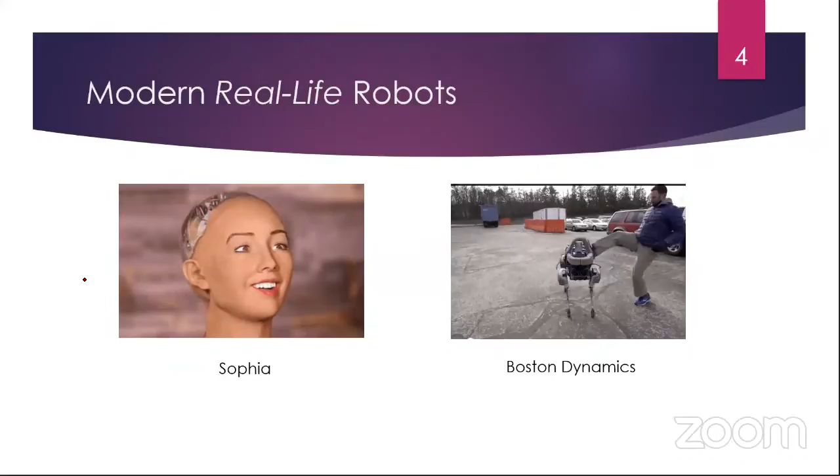Same goes in offices. These robots will not carry papers from one place to the other, bring out papers from one shelf, put them into another. So those kind of jobs, although they look boring, maybe we are not fascinated by that, but we are still very far off from those kind of operations. So although these robots are impressive, they are very far off from what a human is capable of doing.

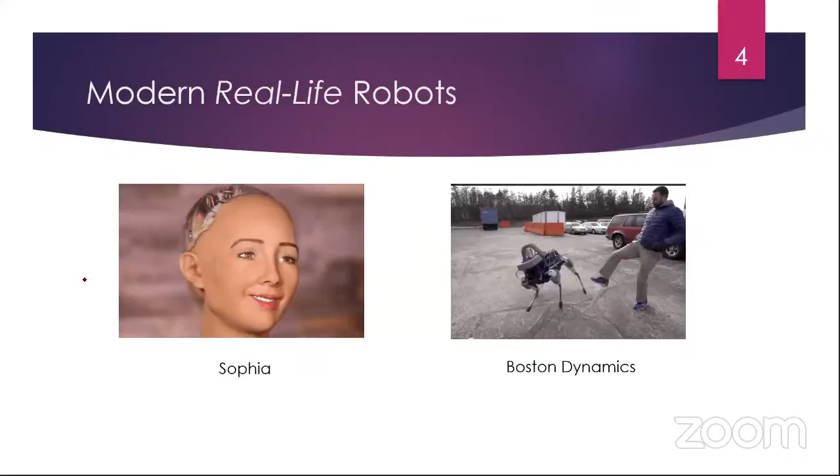So this talk is mostly about the fact that we have now set the standard too high. Sophia robot, extremely capable. Boston Dynamics robot, again extremely capable. These are made in very sophisticated labs, lots of resources, teams of hundreds of people. So the thing is, as engineers working independently or in smaller teams, or in areas where robotics is not the main specialty, what could we do about it?

So in this talk, we will, inshallah, discuss the key ideas, the key skills that we need to acquire before we can make some meaningful robots. And as I mentioned earlier, even though these robots are very specialized, they are still not up to the mark.

And probably some very dull robots, very simple robots, we could make those and they could help us a lot in our homes and offices. So they will not be exactly human-like maybe, but they could help us a lot in our daily life. So that's the goal here. We are not looking forward to making some very fancy looking robots, but looking forward to making robots that help us in our daily lives.

So the first thing, as I mentioned in the very first slide, there are three things that you have to know about. First is, of course, the motion. A robot will be called a robot only if it moves. So the first thing among the basics is actuation, that's the movement. Actuation is when the movement is done through a motor or a mechanical part or anything like that. So that is what we call, in the jargon, the actuation.

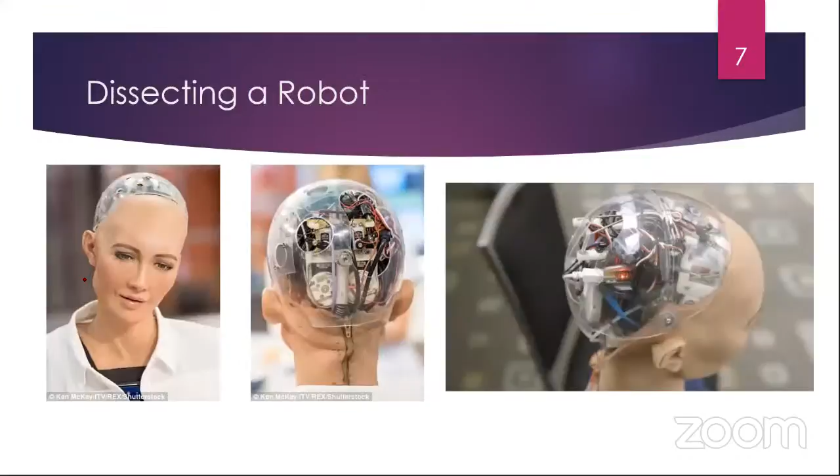So we will see what we could do, as smaller teams in universities and as engineers. Let's start dissecting a robot. Let's go inside and see what makes a robot a robot.

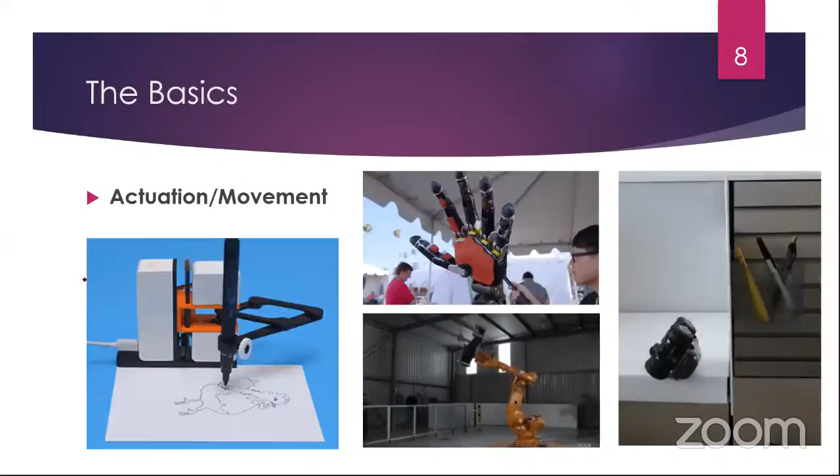The first thing is actuation, the basics. You can appreciate that there are different types of motion. Simple circular motion takes a car from place A to place B. Then we have linear motion, which helps you move things from one place to the other in a linear fashion.

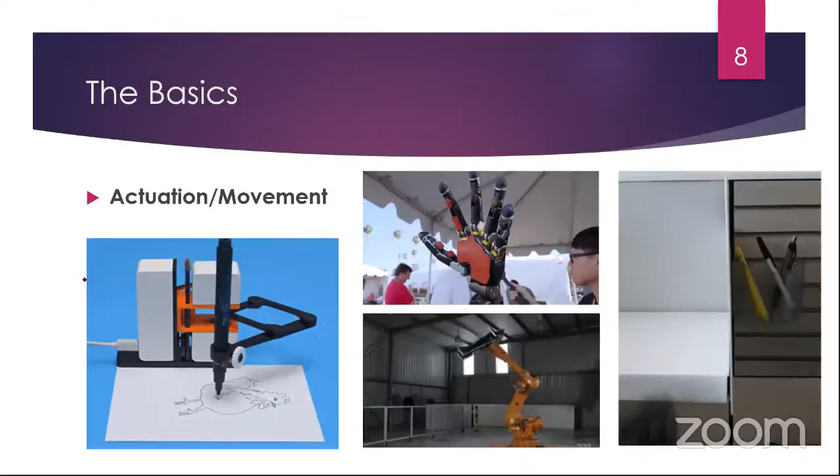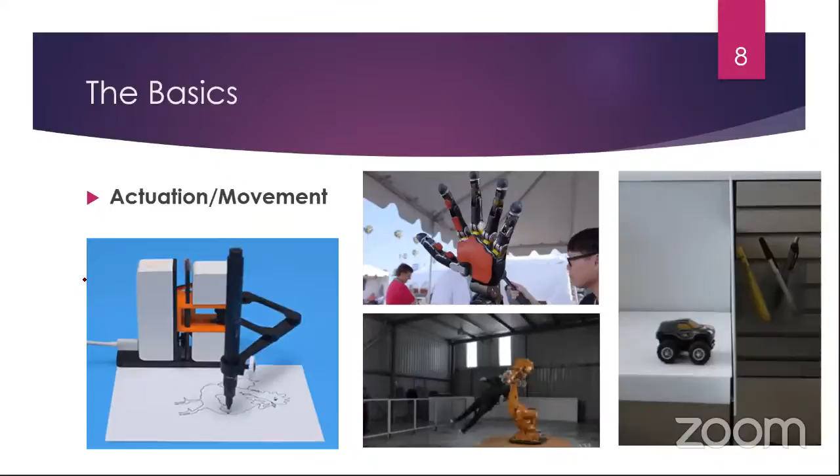And then you could have some very sophisticated motion. For example, in a printer, you need to put ink at a special place exactly where you want it, so very sophisticated motion there. And then grabbing, like a human-like hand for grabbing things, or an industrial grabber for moving heavy objects. All of these require different kinds of motion.

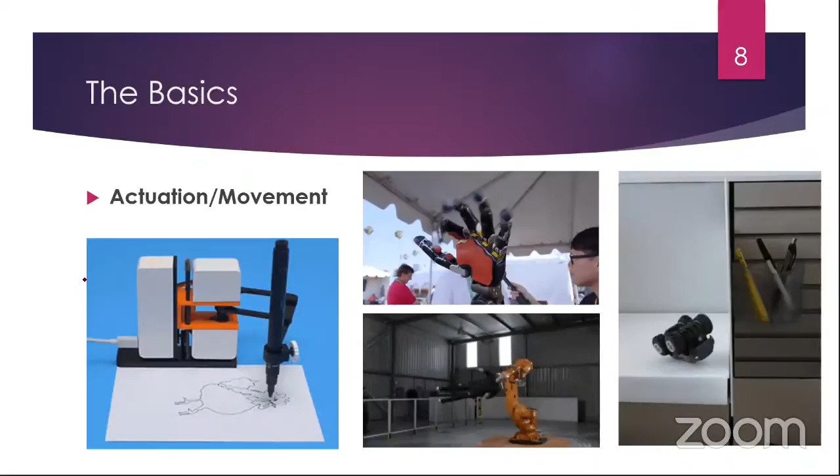So each type of motion requires a different type of motor. I will briefly go over a few types of motors you have to use to achieve those goals. For example, the continuous rotary motion everybody is familiar with, DC motors. Although I've lumped everything up under this small topic of DC motors, there are just too many varieties. DC motors have multiple types.

Some of them are geared to give you extra torque. Some of them don't have gears, to give you a lot of speed. So there are just too many options out there. Once you go deeper into that, you will come to know.

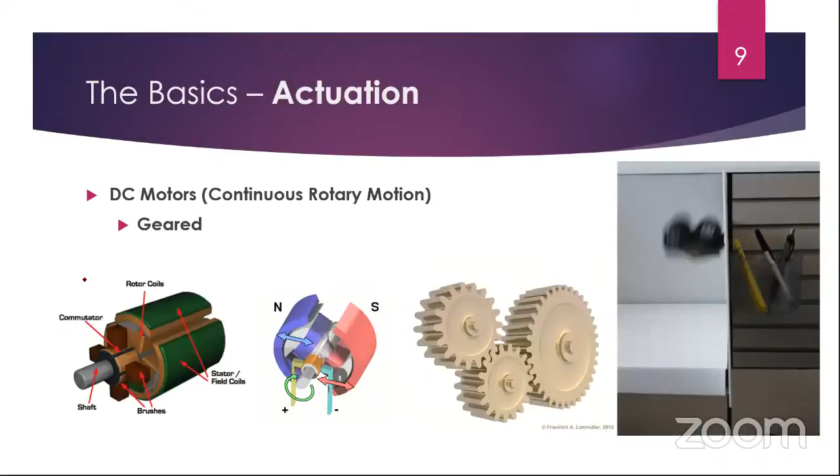Another purpose of the motors, as we saw, was precise motion. You would want the motor to go from one place to the other, or you would want your hand to move from one place to the other, maybe by a millimeter precision, for instance. That would mean you need to measure the amount of displacement that a motor has made, so for that we need these position encoders.

So in the previous slide, we saw that we add gears to the motors to add torque. And then we add position encoders into the motors so that we would also know how much the motor has moved, so that we could make the motion precise as well. Precision and torque - these are the two things we want our motors to have.

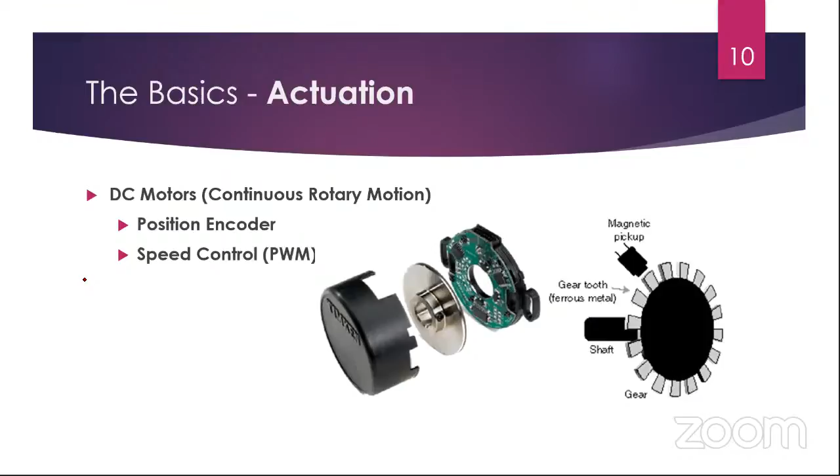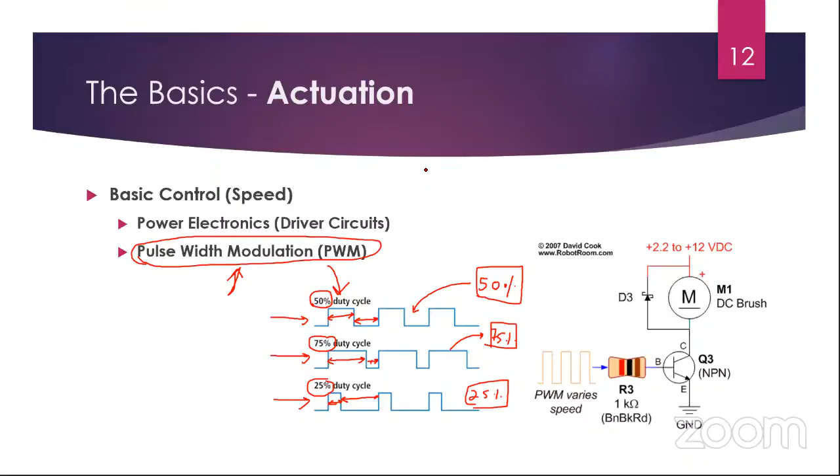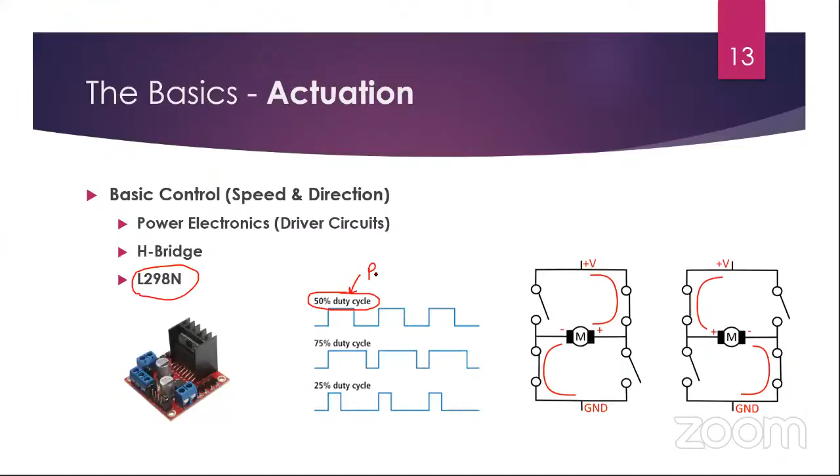Let's quickly move on to the topics where we impart intelligence to robots. Using the same circuit shown earlier, you could not only change the direction of the motors but also control their speed. Using the same type of pulse shape I was showing, there is a name for that: pulse width modulation. Actually, I think this was written here - yes, PWM is pulse width modulation.

So what does that mean? Pulse - we are changing the pulse of the signal, hence the name pulse. And since we are changing the width of that, hence the W. And modulation means changing, so we are changing the pulse width. This is how the motor is being controlled.

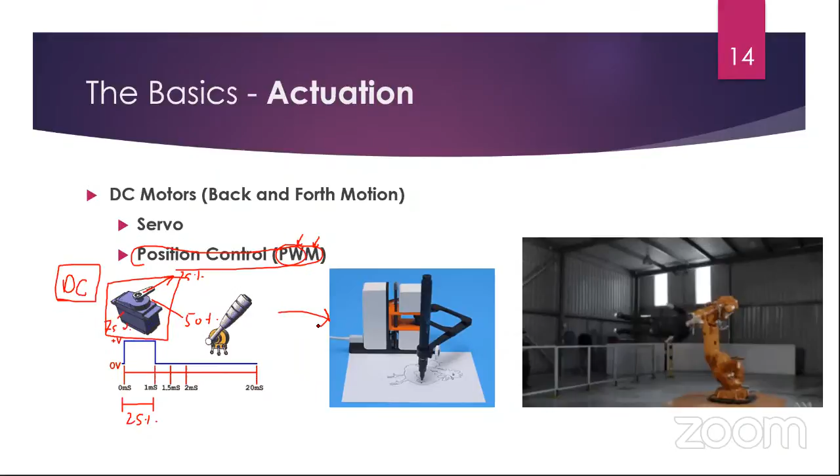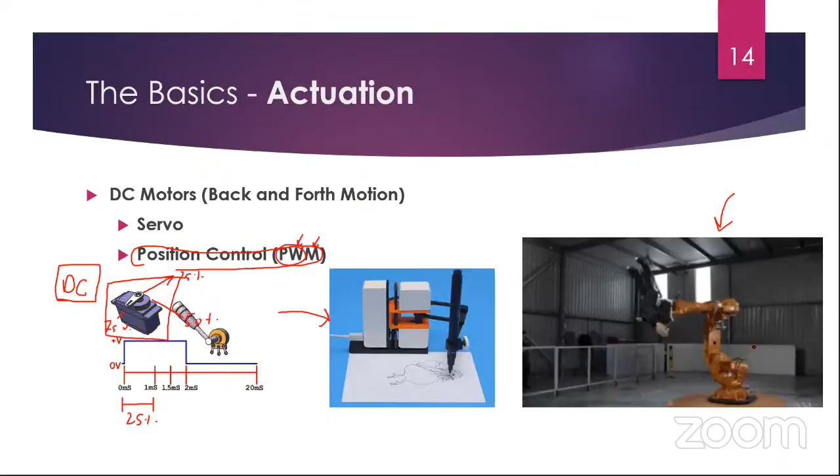This type of motor you could use if you want to build a robotic hand that can move by very precise movement. You hook up multiple of these and you can have a sophisticated design like this one - an industrial robot using 3 or 4 such motors, much larger in size, bigger motors with more torque, but the control is precise, similar to this pulse width modulation. You hook up multiple of these and can make a very sophisticated robotic hand as well.

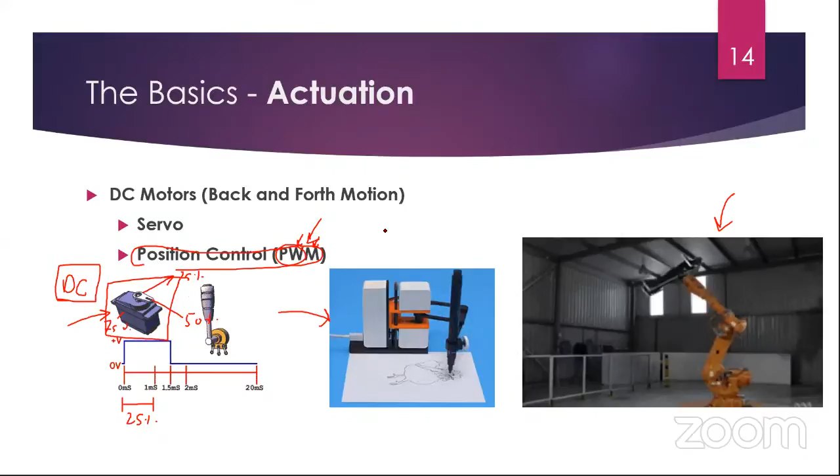So we have seen that motors can give us some torque. We can move them precisely. We can move them in either direction. And these gears help us carry a lot of weight as well. So these are the motors that are already available.

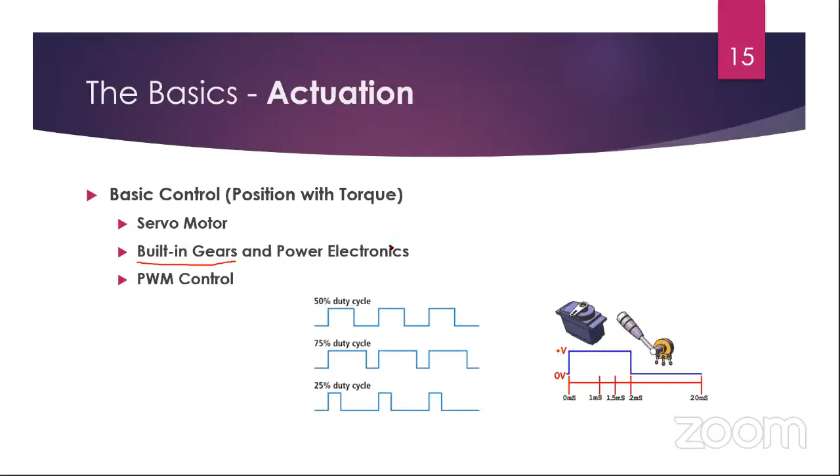And in 2021, we have a lot of very good options available in the market as well. You could very cheaply buy some very capable motors, capable in terms of carrying torque, speed, agility, and ease of control. All of these are pretty cheaply available in the market. To be frank, this is a very exciting time to be in robotics, because even if you are an engineer with low resources, you could build very interesting robots using this.

Another thing we could do with motors: although we saw that the previous motor, the servo motor, could do precise motion, sometimes we want even more precise motion, maybe in the order of millimeters. So that is what we have. For this, we have motors called stepper motors. Stepper motor control is a bit more precise.

It requires multiple pulses. If you are familiar with 3D printers or even normal printers, they make use of such motors, because 3D printers and your normal paper printers require very sophisticated control, since they print using either plastic or actual ink. So you would want them to make very precise movements there. This is where stepper motors come into play.

Generally, stepper motors, although very precise, cannot carry a lot of torque. So if you are looking for an application requiring high torque, you should use a geared motor, a servo motor, or a normal DC geared motor. But if you're looking for very precise motion, this is the motor you should be looking at. The position control requires multiple pulses, and they can be a bit harder to control. But there are multiple hardware drivers available very cheaply in the market that take care of most of these intermediate steps for you.

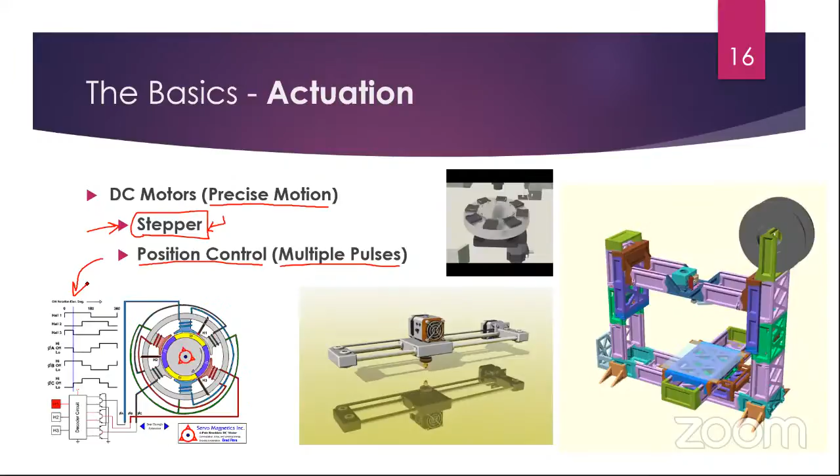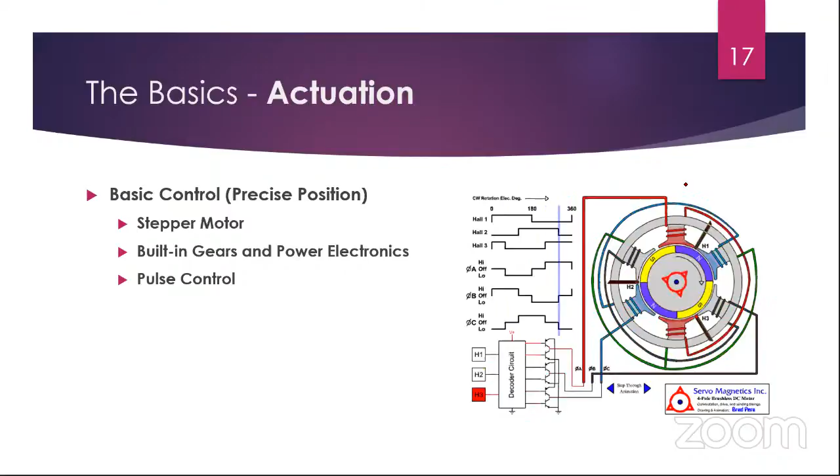So this is some further detail of the same thing. You can see that in order to move it very precisely, in the order of millimeters, you require a very sophisticated set of pulses as input.

So we have seen the basics of the motors: three types of motors to impart speed, torque, or precision. This is the summary of these three.

Then we would, of course, want our robots to feel the environment. In order to feel the environment and make some basic decisions, they would want to make use of some sensors. The sensors can be some very simple ones; for example, some sensors can sense the distance using an ultrasonic sensor.

Maybe some of you are already familiar with this. This ultrasonic sensor, using the echolocation principle, can sense the distance between the sensor and the nearest obstacle. This is a very simple sensor, very easy to use, very commonly available, but of course it has some limitations. For example, if the object is at an angle, sometimes if the angle is too sharp, it may not be able to detect that.

Secondly, it does not work on all kinds of materials. For example, on harder surfaces it will work really well, but on softer surfaces like clothes or foam, it may give you either no reading at all or some very noisy data.

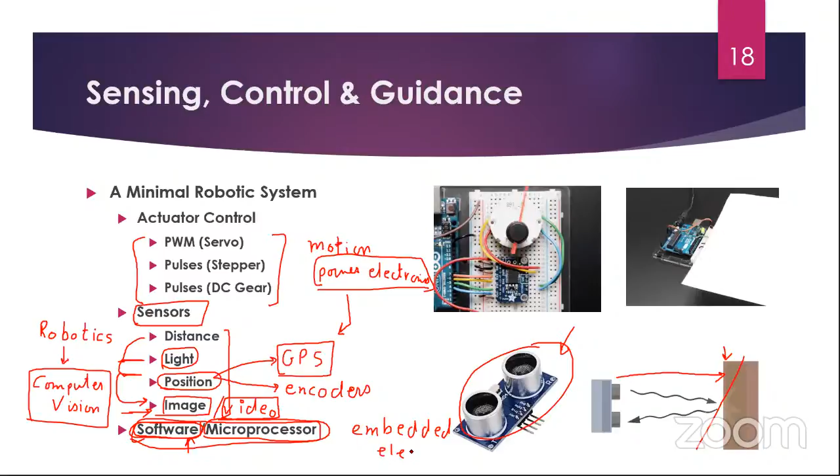So 3 skills, if you want to at least make a robot that is intelligent enough. Not too intelligent still, but if you want some meaningful intelligence, at least 3 skills are required until this stage.

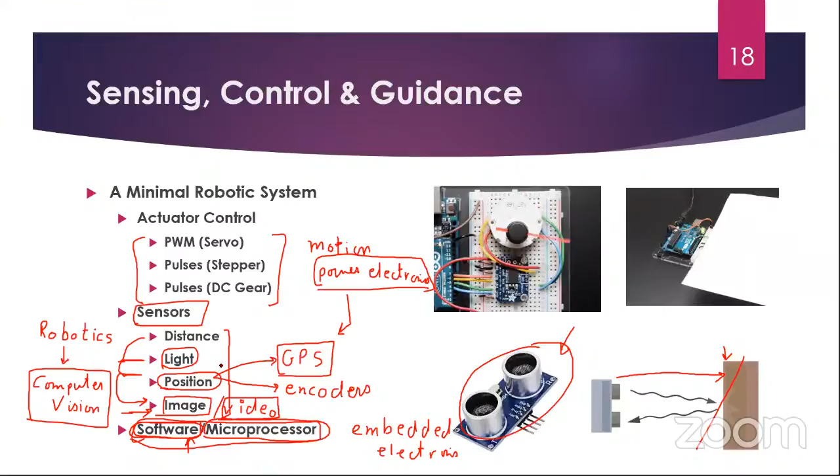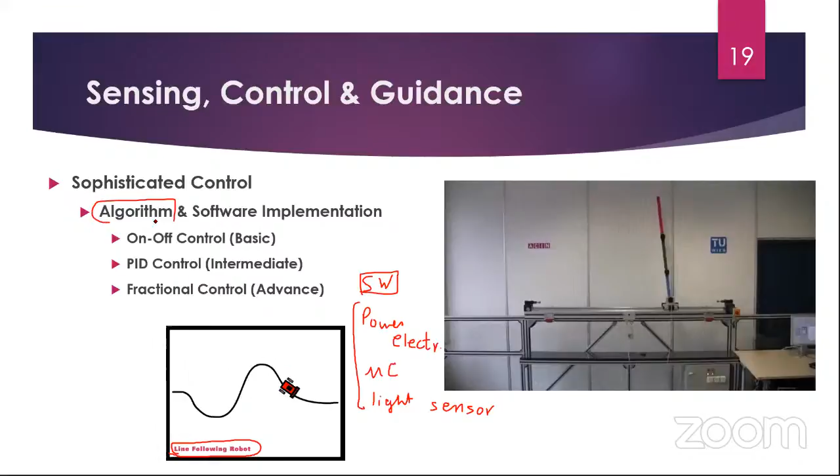The algorithm - even this simple line following application has a variety of choices for the algorithms. You could do a simple on-off control. How would that work? On-off means that your robot turns left, and if it tries to go off the line, then you start turning right. And then again, if it starts going off the line, you turn left. So you just keep on turning left, right, and that would be a simple on-off control.

But you know that control is horrible. This will work only for very small robots, and if you try to make a slightly bigger robot, or you would want a smoother motion path, then this is not going to work.

So in that case, we would want at least a PID controller. So going from basic to intermediate, this PID controller - those of you who have taken control system courses may already be familiar with that. So this is a much better controller than the on-off one. But quickly we have added another skill to our required number of skills.

So that is the basic control. So you would know what is actually PID and how that would come into play when you have the sensory data coming from this light sensor.

So this sensor is telling you a rough position of the robot, and how you use that inside a PID controller to make this motion smoother. This is still an intermediate level algorithm.

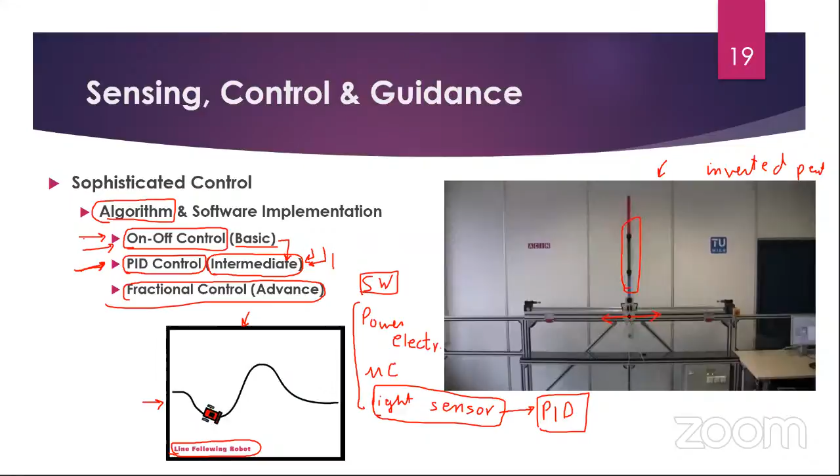And you see, the only motion that it can do is this translation motion. Using that and some sensors that it has, all these 3 links would have sensors, and those sensors tell the controller what is the position of each one of these links. Based on that position, it is trying to balance it. But the remarkable thing here is that it has only one available motion, and that is just translation.

So this problem could, strictly speaking, be also solved through PID. PID is actually a very universal algorithm that is widely used in robotics applications.

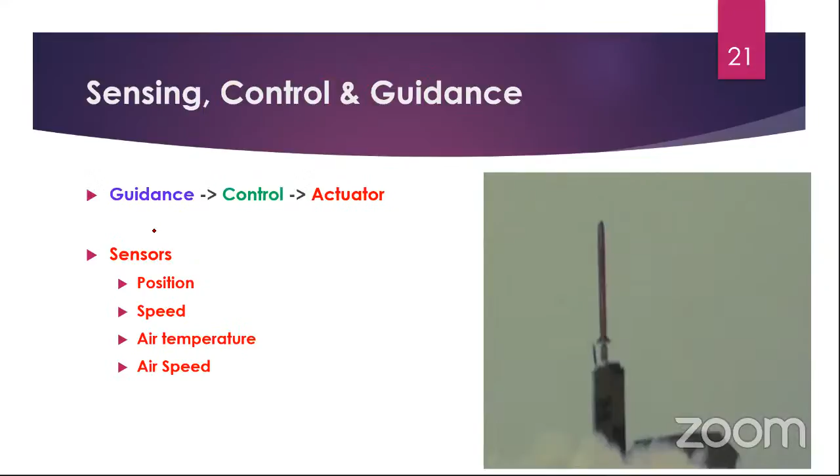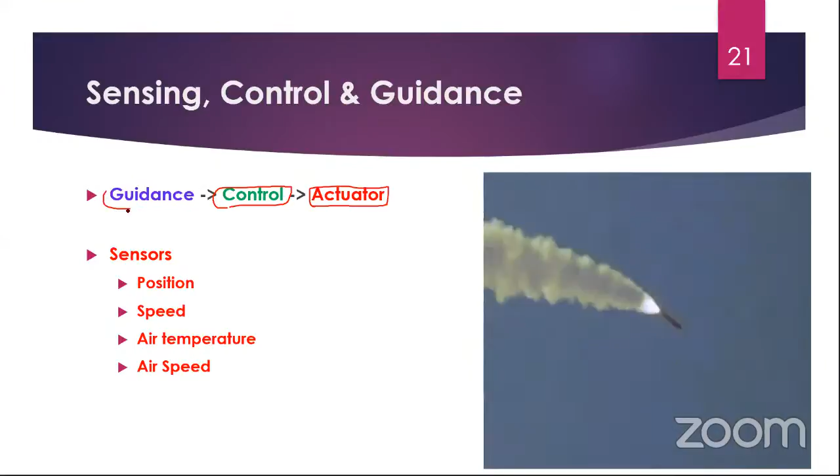That guidance could involve some more sensors. For example, in an actual missile, the actuator is a simple motor, sometimes a rocket or something, and you control the actuator through sensing - maintaining the position, attitude, speed, and height from the ground. But then you have to guide the missile, or the rocket, or airplane, whatever it is. Guidance is on top of these basic level controls, and might require more sophisticated sensors.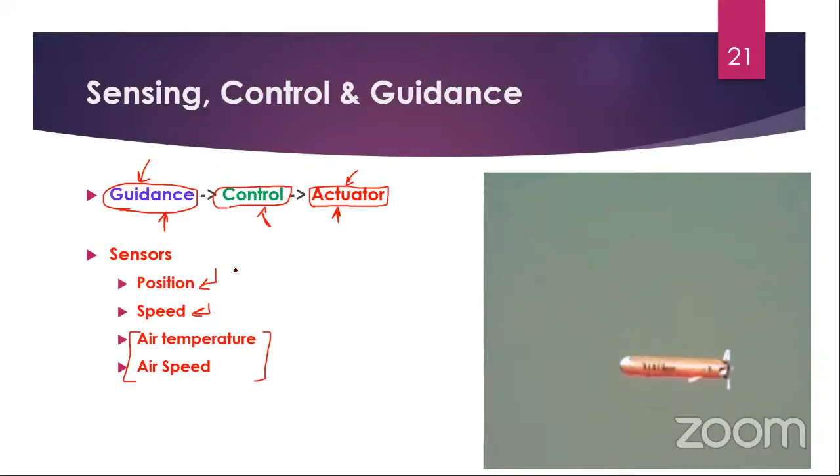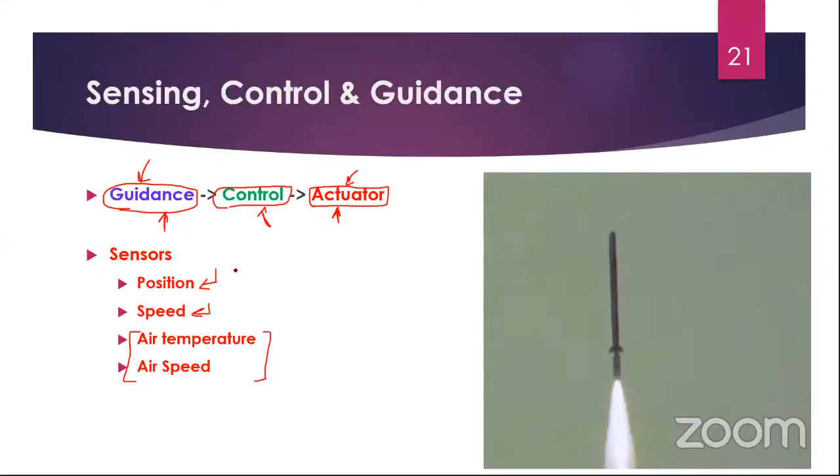Position is important - it was important for simple actuator control as well, but in guidance this is also important. Speed too - actuator control requires speed, and guidance also makes use of that sensor. Air temperature and air speed may not be very meaningful for the actuator control part, but guidance will use these sensors to make certain decisions. For example, if the air temperature is too high, you might want your rocket or airplane to climb higher or climb down, because the electronics cannot work at that temperature. Or if the speed is too high at lower altitude, you might want to go higher up so the airspeed is lower and there's less resistance. So guidance has its own set of algorithms and sensors.

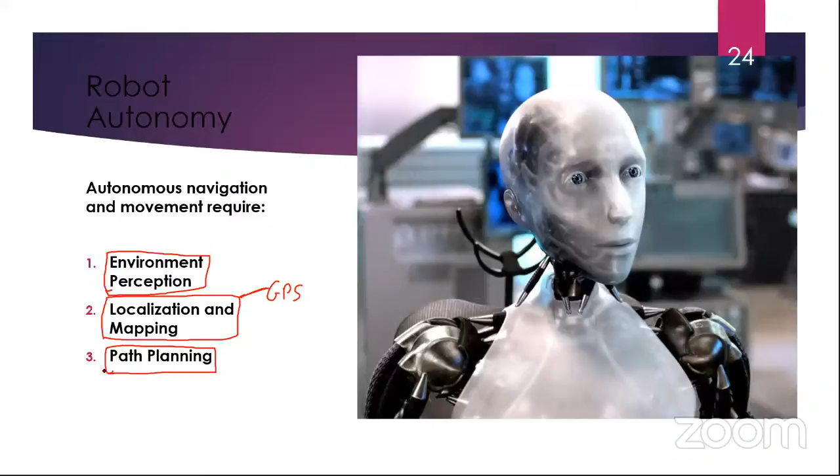So in that slide, we actually looked at a few things. In scene understanding, for example, object detection and localization, we saw that cameras can do a very fine job combined with machine learning approaches - is there a car in front of me, is there a person in front of me, and where exactly is that person or the car. And segmentation, we saw that it could tell us where is the road, which part of the image is the road, which part is the sky, and so on. And then localization and mapping - again, outdoors this is not much of a problem, thanks to GPS, but indoors we have a lot of trouble. So there are certain algorithms that have been refined over the years, all of them based mostly on your wheel encoders, which are inside your motors, and images and videos.

That's why computer vision, image processing, and machine learning have to play a bigger role in robotics tasks these days. Machine learning is almost synonymous with these fields now. Although it is an entirely different field than computer vision, it uses so much computer vision and image data that sometimes people think they are one and the same thing, but they are not.

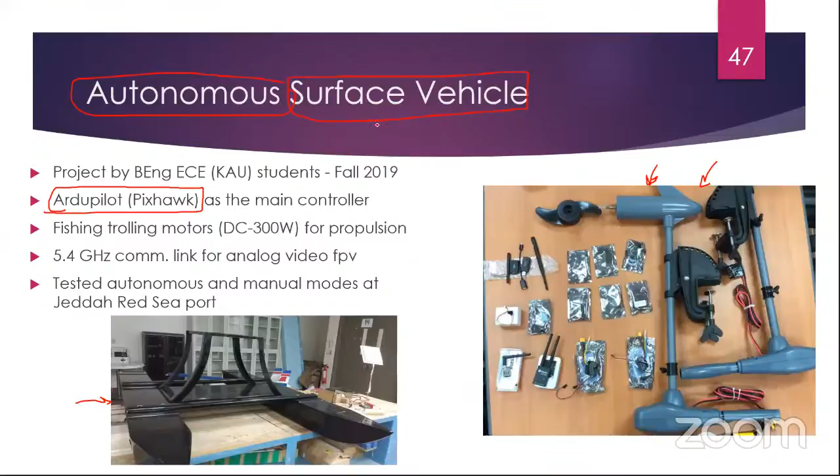At the start of the project, I personally was quite nervous because we could not find any example online where people hooked up these fishing motors with the Pixhawk, and we had to install them on our own custom-made structure.

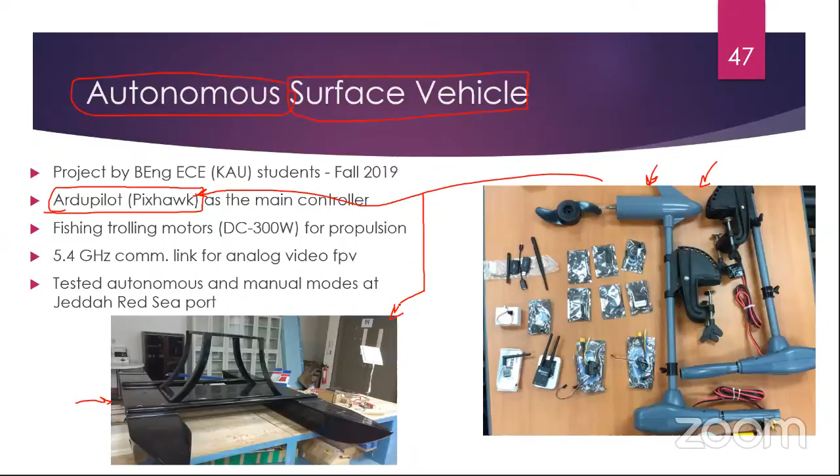Which was done by our aeronautical department. A lot of things were there—they should have worked in theory, but we did not have anything in practice. But alhamdulillah, on the very first attempt, we took this to the sea and hooked everything up, although we were confident it would work, we had never tested it.

So this was, you could say, more about using off-the-shelf components and integrating everything to deliver a system. The results were, alhamdulillah, very good, and I was happy with that. But strictly speaking, we did not go into the details of it—we did not make all the parts ourselves, we just integrated them.